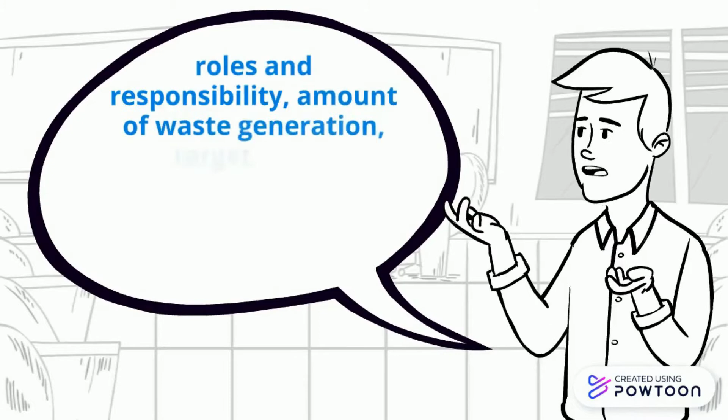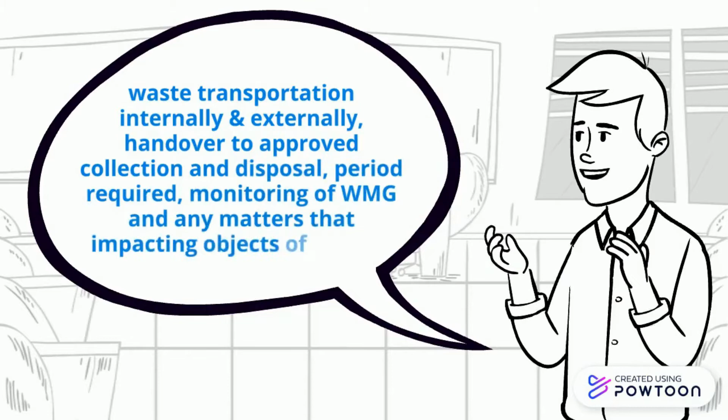The scope covered includes roles and responsibilities, amount of waste generation, target waste minimization, control over management of waste, storage of waste, waste transportation internally and externally, handover to approved collection and disposal, required monitoring of the WMG, and other matters impacting the objectives of the Act.

What is a site operating record? SOR is used by WMG and includes facility permit documentation and design plans for site development, SOP inspection records, training records, monitoring data records, waste receipts, and site-specific data.

Roles and responsibilities. Licensed contractor: provide documentation of required environmental training, perform work activities in accordance with training and contract specifications, and take care of materials, equipment, and other services.

Storage supervisor: keep equipment operating by enforcing operating instructions, secure the warehouse by turning the alarm on, and supervise staff.

Safety and Health Officer: investigate and complete reports, provide guidance with PPE selection based on job hazard analysis, and provide general chemical safety guidance. Safety, Health and Environment Officer:

implement and maintain programs to achieve environmental targets and objectives, stay current with identified environmental, legal and other requirements, and serve as the emergency response coordinator.

Occupier: maintain accurate and up-to-date health records, provide and maintain systems of work that are safe and without waste, and prepare a written statement of general policy with respect to safety and health.

Waste Management Officer: aim to achieve waste reduction targets, manage waste management schemes, and control the budget for waste disposal.

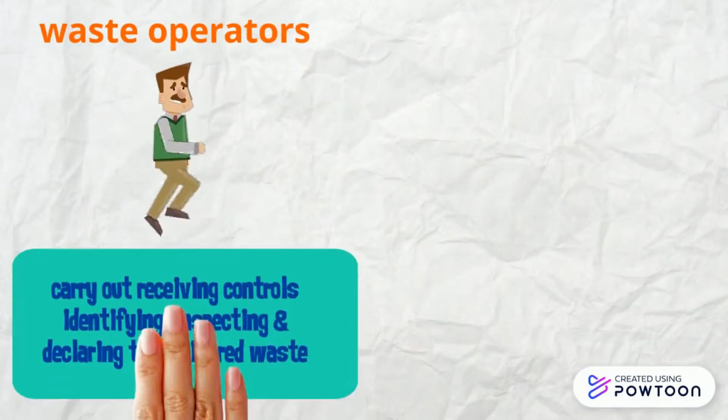Waste Operators: carry out receiving controls, identifying, inspecting, and declaring the delivered waste, and monitor activity and perform tasks by ensuring compliance with legislation and standards.

Emergency Response Team: provide training records if requested, and coordinate environmental response duty with the Safety Officer.

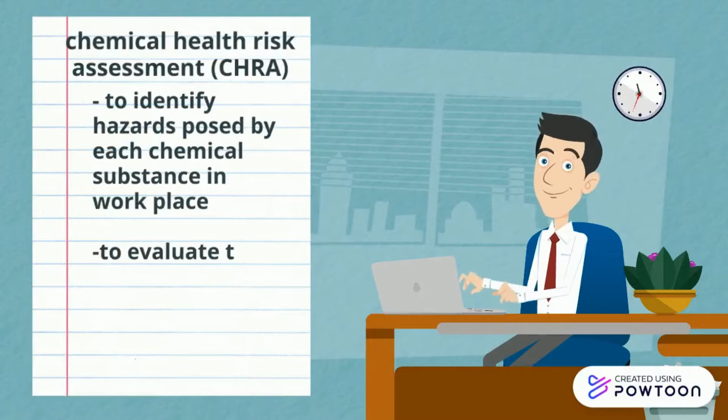Chemical Health Risk Assessment: to identify hazards posed by each chemical substance in the workplace, and to evaluate the degree of exposure for employees to the chemical substance.

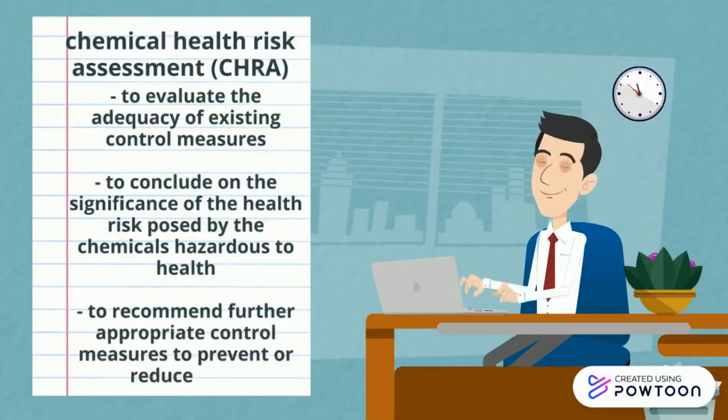Training programs for handling hazardous waste are crucial in order to train competent workers. Workers must be instructed on how to document and maintain required records, characterize hazardous waste, identify appropriate waste containers for storing and shipping, label and mark containers during storage and shipment, manage the waste storage area, utilize manifests, protect employees from hazardous waste, and respond to hazardous waste emergencies and spills.

Waste minimization program: contractors, design teams and suppliers are encouraged to minimize the amount of waste produced through reuse on-site, reuse off-site, and recycling off-site.

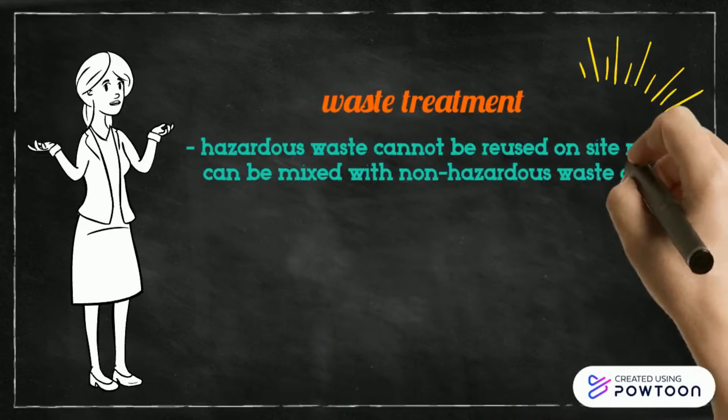Waste treatment: hazardous waste cannot be reused on-site nor mixed with non-hazardous waste, as there is a requirement under the Environmental Quality Scheduled Waste Regulation 2005 to treat any waste, including hazardous waste, at the point of origin or at an alternative suitable site prior to this.

Waste disposal: the Department of Environment will be contacted to determine the most appropriate waste transfer station to handle the waste material being produced. The transfer station would then send it off for final disposal.

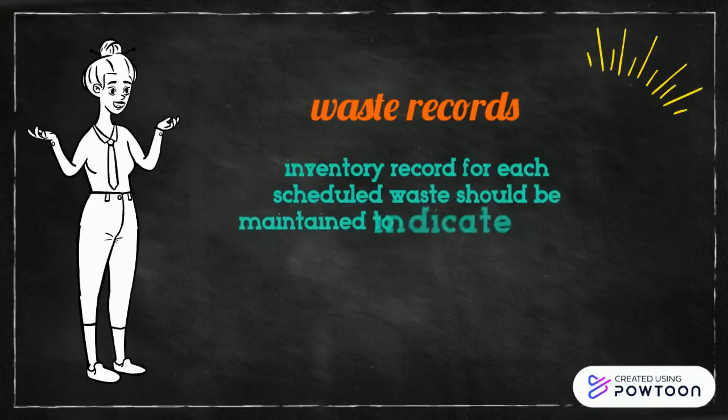Waste records: inventory records for each scheduled waste should be maintained to indicate the date, type and quantity of waste. Waste consignment notes for movement of hazardous waste from one station to another station are as follows: first,

the competent person provides information in the waste card to be delivered to the contractor upon collection of waste. Second, the competent person shall complete part 1 of the 6-part scheduled consignment note in 6 copies and hand it over to the contractor.

Third, the licensed contractor shall complete part 2 of the 6-part scheduled consignment note in 6 copies and shall hand over 2 copies of the consignment notes back.

Fourth, 1 copy is submitted to the Director General of DOE within 30 days of the scheduled waste collection date, and 1 copy is to be kept for recording purposes.

Fifth, the occupier shall complete part 3 of all remaining 4 copies of the 6-part scheduled consignment notes once the scheduled waste has been delivered to the prescribed premise.

Sixth, upon completion, a complete copy of the consignment note shall be kept by the occupier for recording purposes. Waste management audit and review covers audit of records for activity training, audit of any waste management failure, and audit of waste disposal at the final destination of the waste.

Oil and gas refinery waste generation can be allocated from the refinery, mess hall, and control room within the facility.

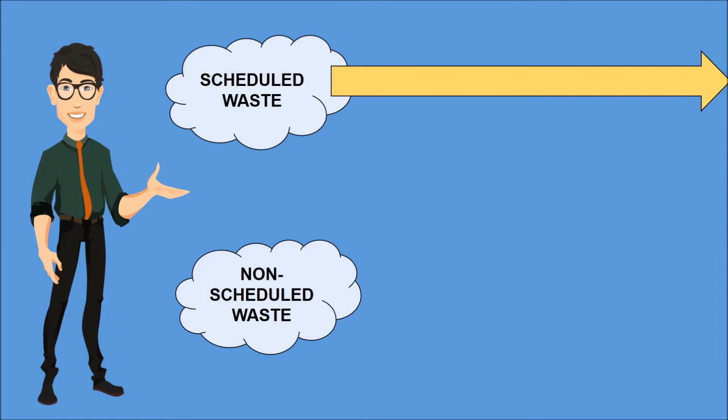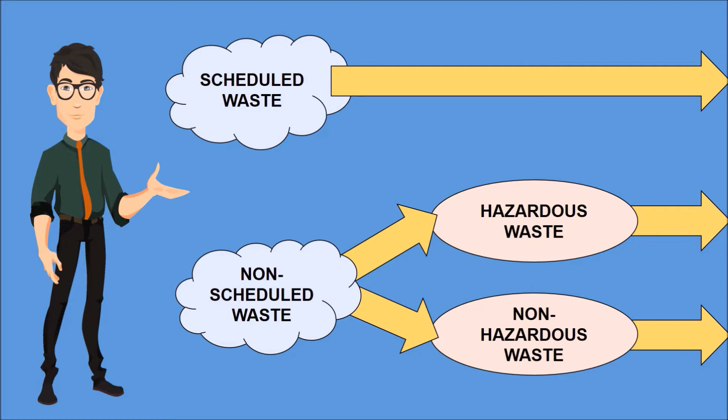Waste identification and classification: waste is classified into scheduled waste and non-scheduled waste based on the Environmental Quality (Scheduled Wastes) Regulations 2005. Non-scheduled waste is further classified into hazardous waste and non-hazardous waste. Scheduled waste examples can include mercury, hydraulic oil, catalyst, oxidizing agent, and oil tank sludge. Hazardous but non-scheduled waste can include used or worn-out PPE, used containers or drums, oily rags, and materials with chemical residues. Non-hazardous, non-scheduled waste includes papers, office waste, and packaging waste.

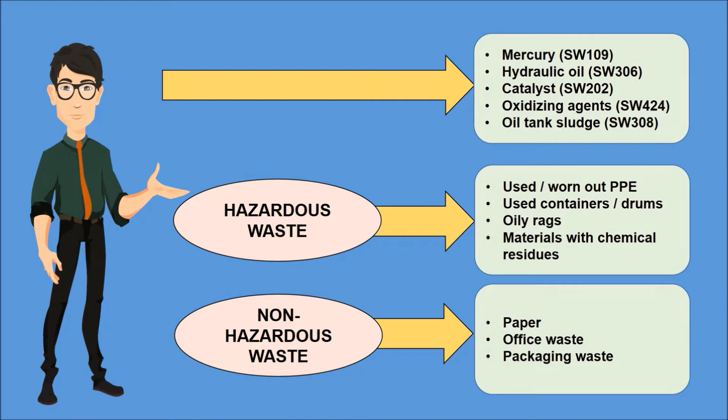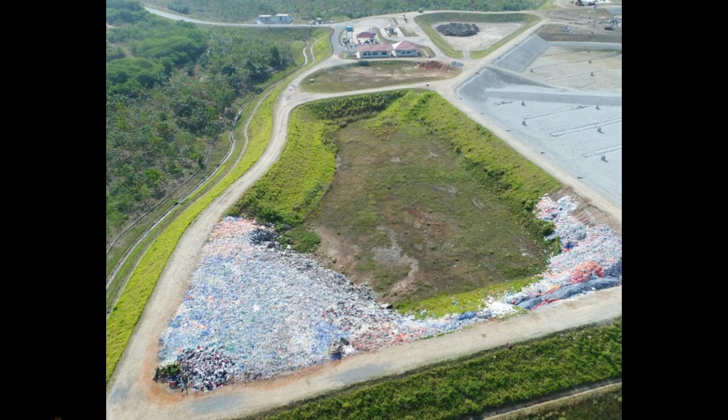Waste will be further classified based on treatability, whether treated on-site or handed over to contractors, its recyclability, reusability, and recoverability. Non-hazardous waste that cannot be recovered, reused, or recycled will be disposed of in landfills.

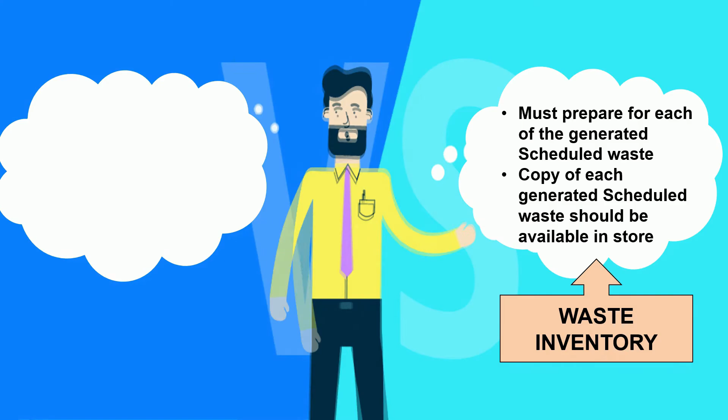Waste inventory and notification: a waste inventory must be prepared for each generated scheduled waste. The form can be found in the appendix of the waste management plan. A copy of each generated scheduled waste record should be available in store.

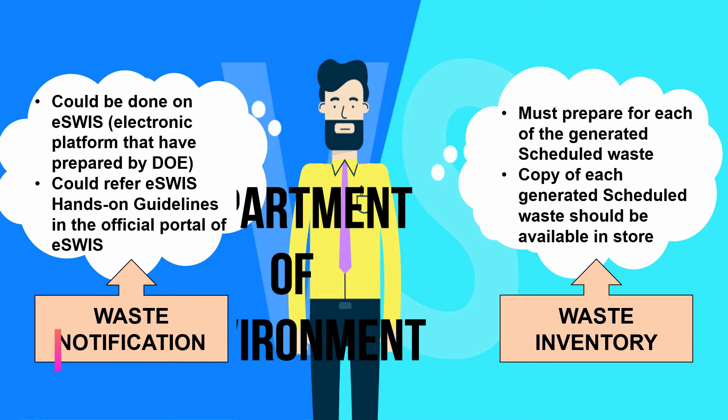Waste notification: notification of generated scheduled waste should be done within 30 days from the date of generation. This can be done on eSWIS, an electronic platform prepared by the Department of Environment (DOE). You can refer to the eSWIS hands-on guidelines on the official eSWIS portal.

Waste storage: when handling waste for storage, workers must ensure the right personal protective equipment (PPE) is available. Correct wearing methods should be taught through necessary training programs, and maintenance and regular checking of PPE condition is a must.

Workers should equip themselves with safety goggles, safety gloves, non-slip sole steel-toed boots, and fitted, full body coverage clothing.

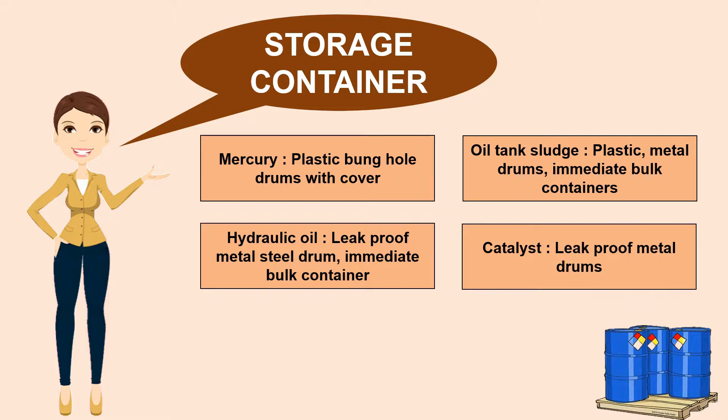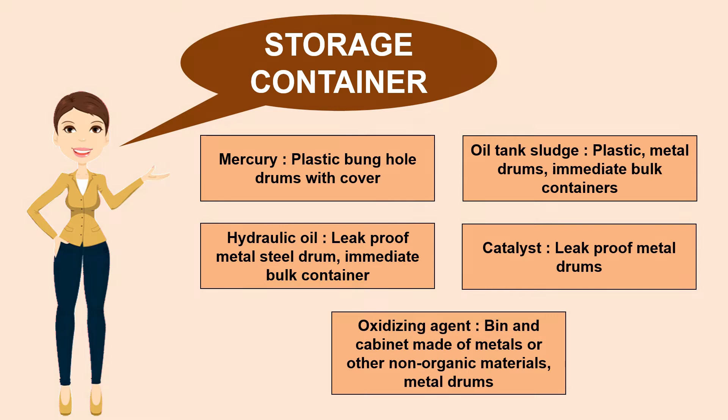Waste storage containers: for mercury, use plastic bunghole drums with a cover. For oil tank sludge, use plastic or metal drums, or intermediate bulk containers. For hydraulic oil, use leak-proof metal steel drums. For catalyst, use leak-proof metal drums. For oxidizing agent, use bins and cabinets made of metal or other non-organic materials, as well as metal drums.

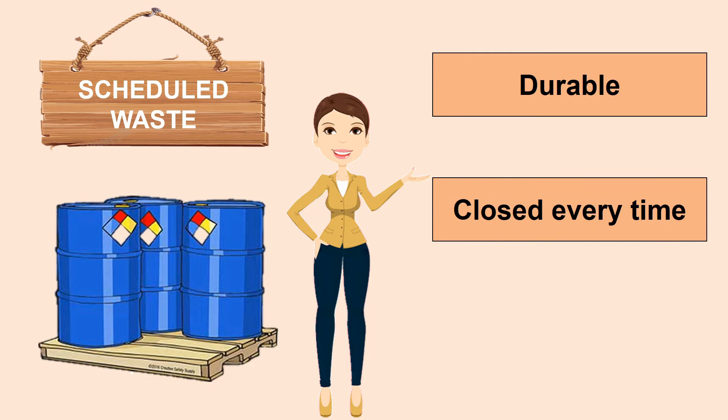Requirements for scheduled waste storage containers: they must be durable, closed at all times, tightly lidded, properly labeled, compatible with the waste, in good condition, with a capacity of at least 110%. Tanks for waste oil should have secondary compartments, and any spillage should be contained immediately.

Requirements for non-scheduled waste containers: properly closed, properly labeled, tightly lidded, well maintained, selected based on waste characteristics, able to prevent leakage and moisture, and any spillage should be contained immediately.

Labeling of containers: the label specification for scheduled waste is as follows.

Examples of scheduled waste pictograms include explosive substance, inflammable liquid, inflammable solid, solid spontaneously combustible, solid dangerous when wet, and oxidizing substance.

Types of labels can include stick-ons, metal plates, stencils, or printed directly on the container or package, and they should be clearly displayed and not fade off with time.

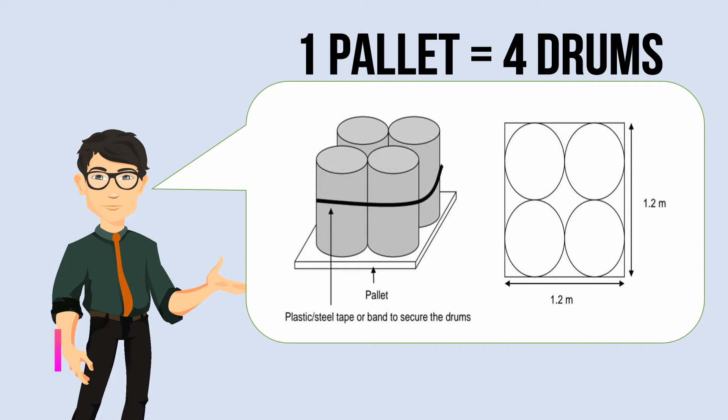Storage of waste should be done in a manner where drums are placed on pallets, with one pallet consisting of 4 drums, secured by tying the drums with plastic or steel tape. With the availability of crate storage, stacking of pallets can be done up to but not more than 3 tiers. Without crate storage, stacking should not exceed 2 tiers, in rows 2 pallets wide, and drums must always be stored vertically.

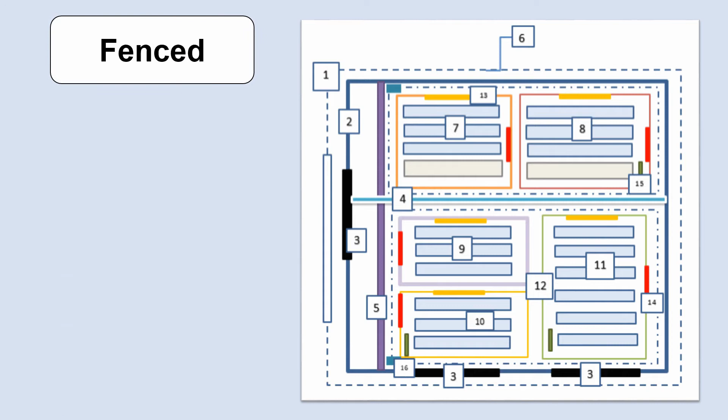Here's an illustration example for special storage in waste management. The area should be fenced, prevent entrance of unauthorized personnel, and be equipped with an emergency exit.

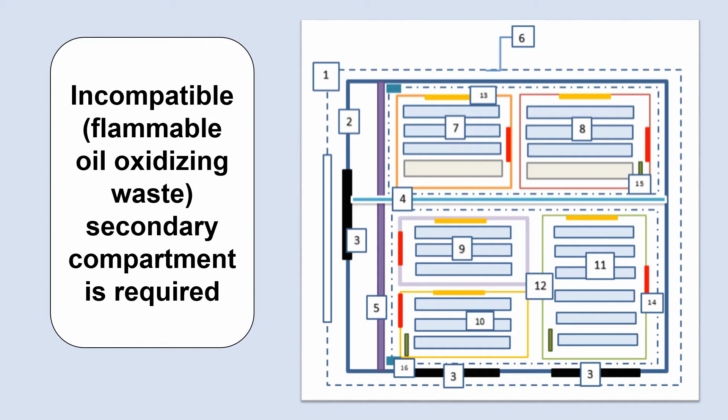An incompatible secondary compartment is required for materials such as flammable hydraulic oil and oxidizing agents. The storage area should be surrounded with a concrete dike to contain any form of spillage.

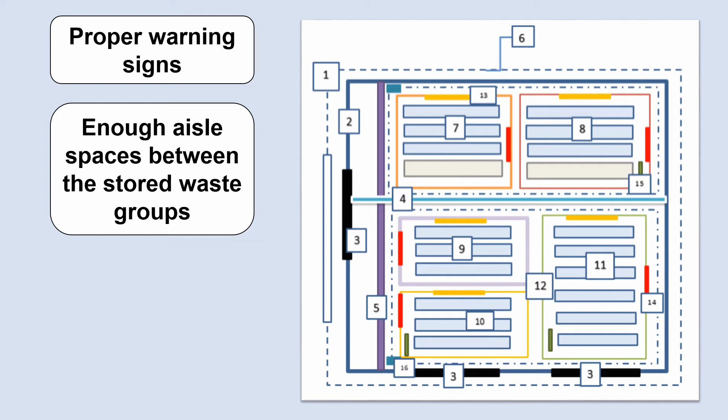Proper warning signs should be in place, with enough aisle space between stored waste groups. Safety and emergency equipment such as emergency firefighting equipment, emergency communication devices, and a spill kit should be available.

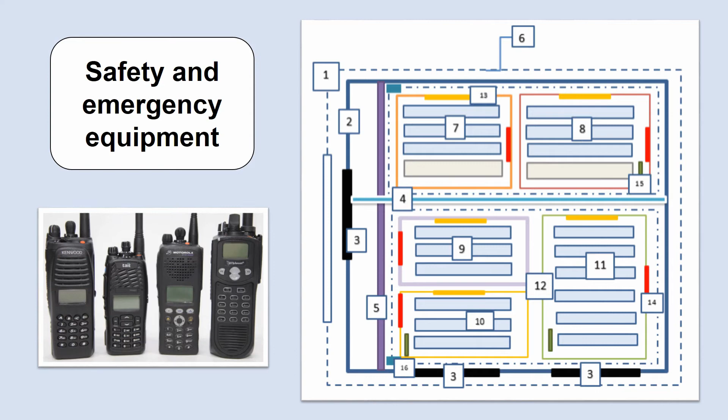Requirements for the storage area of hazardous waste: it must be separate from working spaces, cafes, working restrooms, and other such places. Avoid high-risk areas that can be flooded, areas with hill edges, or areas with slopes. The area must have a dedicated person in charge (PIC).

The storage area must be equipped with a copy of the waste inventory, must avoid exposure to moisture, and must undergo regular inspection and maintenance.

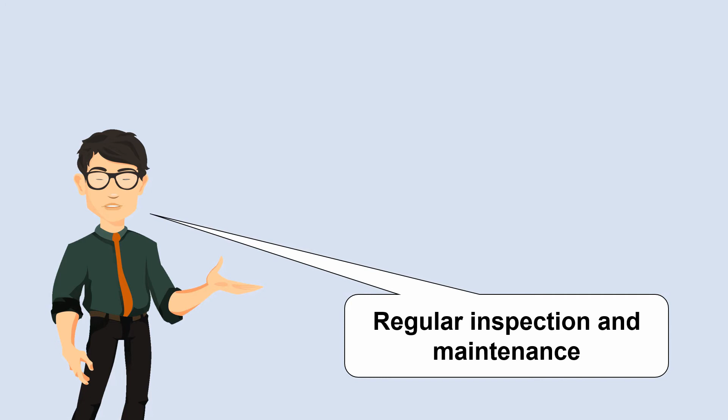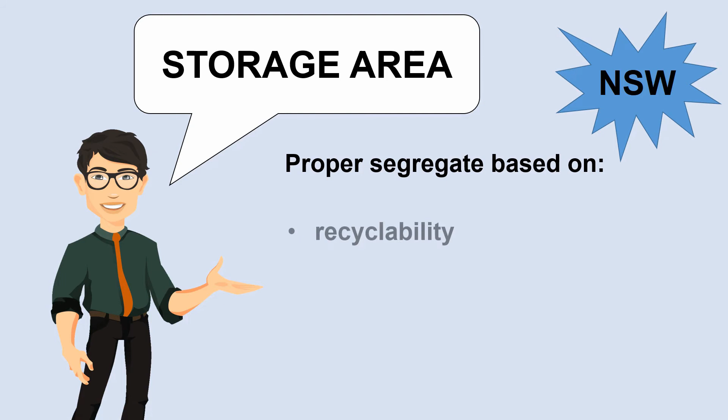Requirements for storage area of non-scheduled waste: proper segregation based on recyclability, treatability, hazardousness, and reusability, with a clear warning signboard such as 'No smoking' included.

Waste transportation: transportation of waste is categorized into internal transportation and external transportation.

Internal transportation is the movement of waste generated from their location, such as refinery, mess hall, and control room, to means of storage, recycling, treatment, or disposal. Workers can use forklifts or pallet jacks for moving heavy loads of waste within the facility.

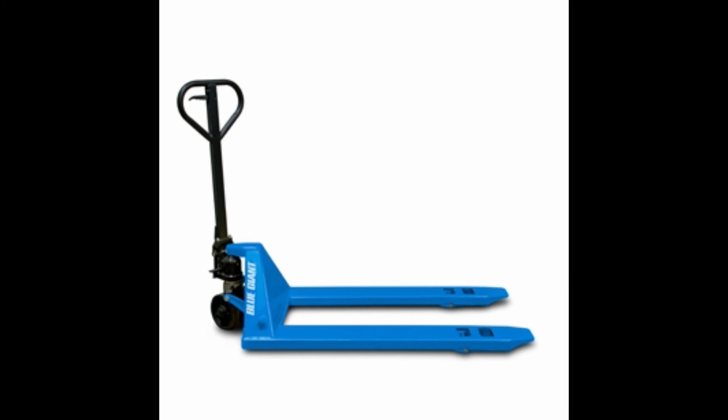This includes movement of waste generated from the refinery, waste movement from the mess hall, and waste movement from the control room.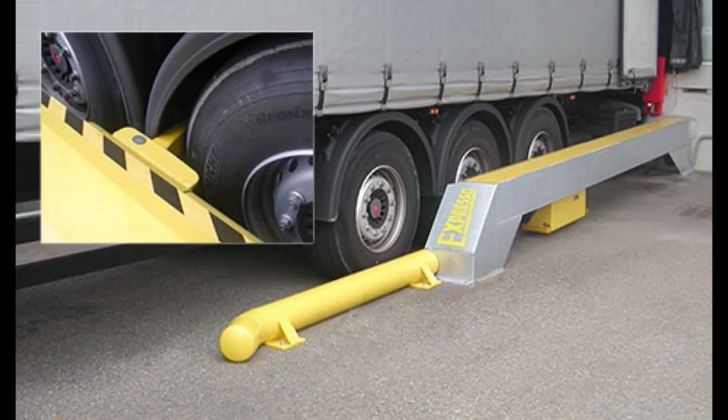External transportation consists of all operations in moving scheduled waste outside the facility. Procedures should include all aspects of operation from arrival to departure, including wheel blocking to prevent movement of the vehicle, verification of proper connection and disconnection of the tube, connection of the grounding system, and adherence to no smoking and no naked lighting policies for drivers coming into the facility.

Confirmation of contractor identification and clearance for entry is required. Qualified staff performing loading and unloading operations should adhere to safety protocols to avoid unintended releases and hazards from fires and explosions. Workers must follow chemical handling standard operating procedures.

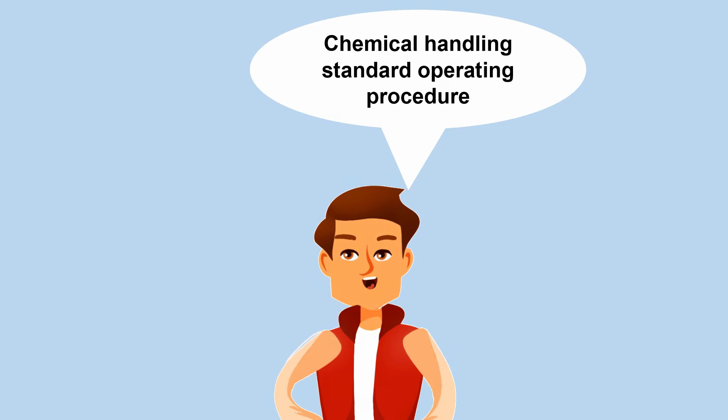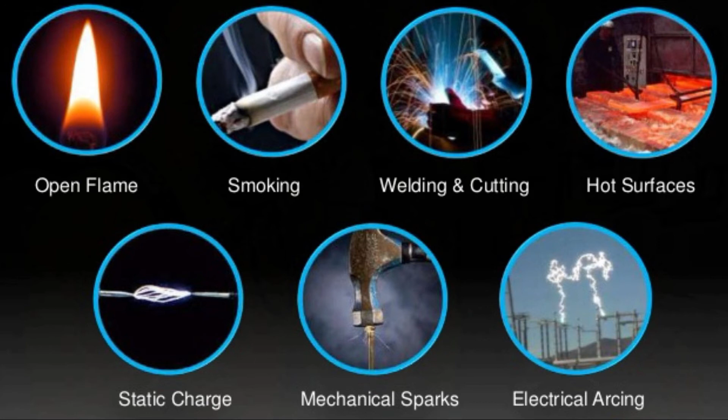Some of these include reading the label and safety data sheet before handling the chemical, ensuring that chemical containers are tightly closed at all times during loading and unloading, preventing sources of ignition such as smoking or electrostatic charge, and using adequate protection such as personal protective equipment to prevent direct contact with chemicals at all times.

When dealing with a contractor, ensure the contractor has a well-developed job hazard analysis for transporting the waste, including procedures for dealing with incidents involving waste spillage or burning, along with a protocol for the emergency response plan. The contractor handling any cargo of waste must obey the road rules and regulations of the country. Selection of a contractor should be based on the waste group registered and the scheduled waste facilities offered.

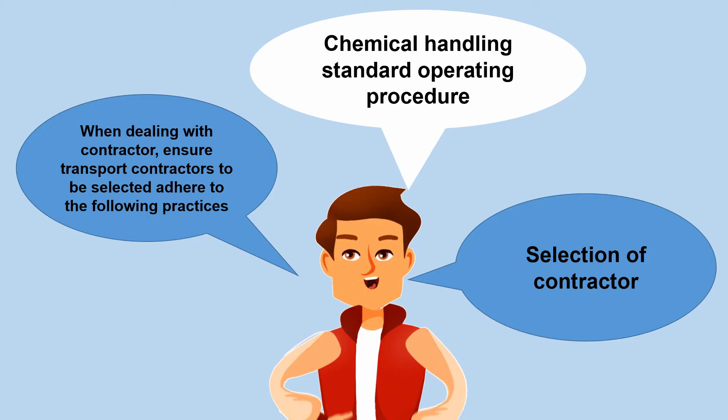Operations for transferring scheduled waste to the contractor: workers must provide a properly prepared consignment note to the contractor. The contractor must sign and date the consignment note to acknowledge receipt and return a copy to the worker.

Waste generators are to provide information for each category of scheduled waste, which must be delivered to the contractor in accordance with the 7th schedule. Workers shall give the schedule to the contractor upon delivery of the waste, and must understand the intent and uses of the 7th schedule and inform the contractor accordingly.

Upon completion of the scheduled waste transfer process, the contractor may leave the oil and gas refinery facility and begin heading to its designated location. Workers must track the hazardous waste from the time it leaves the facility until it reaches its designated location.

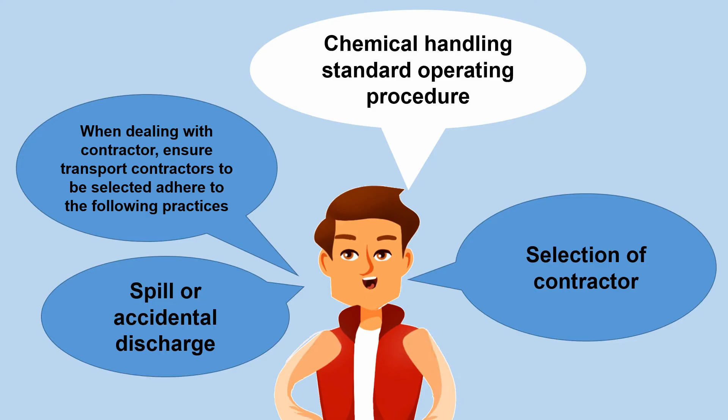Spills or accidental discharge: if a transporter discharges or spills hazardous waste, it is required to take immediate and appropriate action to protect human health and the environment. Actions include immediately informing the Director General. The contractor shall do whatever is necessary to contain, clean, or reduce the spill. Waste generator workers shall give technical expertise and support in any cleanup operations, including initial containment and reduction of the spill.

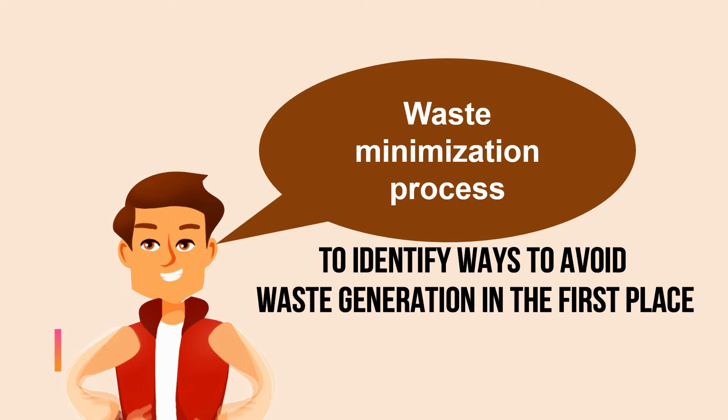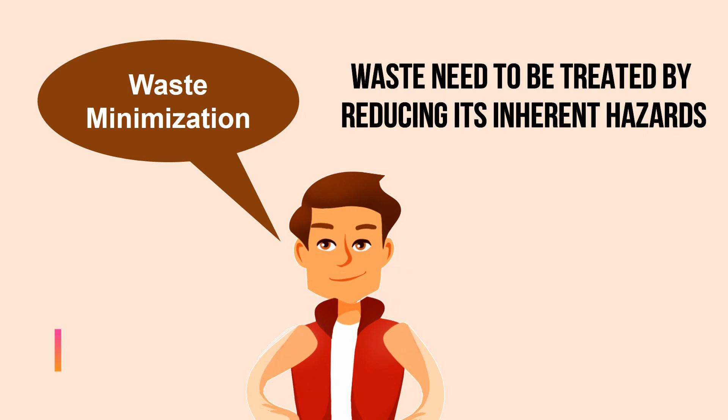Waste recovery and recycling: waste minimization methods within the facility's waste management program identify ways to avoid waste generation in the first place and to minimize the amount of waste produced wherever possible. To minimize its possible effect on disposal, waste needs to be treated by reducing its inherent hazard. The waste minimization process is divided into information gathering, analysis, implementation, and result measurement.

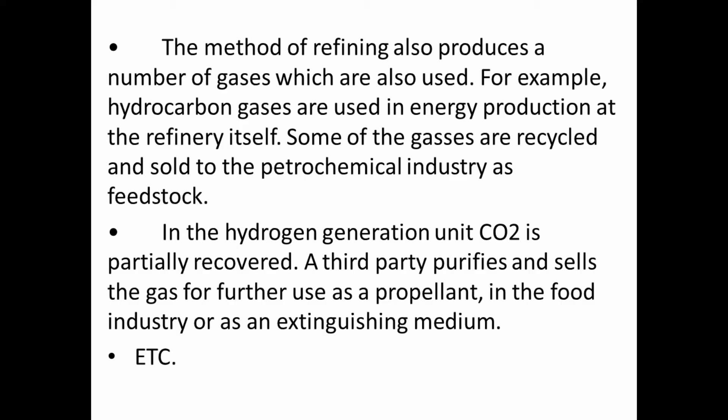Enhanced recovery and reuse is a method used during the oil and gas refining process itself, where side products are produced and turned into reusable material products. Examples of side products include fractions of crude oil, which can be transformed into base oil used for producing lubricating oils. Other examples are as follows.

Waste disposal: waste will be disposed of at approved third-party facilities or controlled waste management sites suitable and in accordance with relevant laws and regulations in their area. Only licensed contractors are allowed to treat and dispose of scheduled waste. Information on scheduled waste must be completed by the generator, contractor, and occupier of the prescribed premise.

The waste generator shall submit the information within 30 days from the date of transportation. The contractor shall, within 10 days from the date of receipt of delivery, submit the information to the occupier of any prescribed premise. The occupier of the prescribed premise shall submit the information within 20 days from the date of receipt.